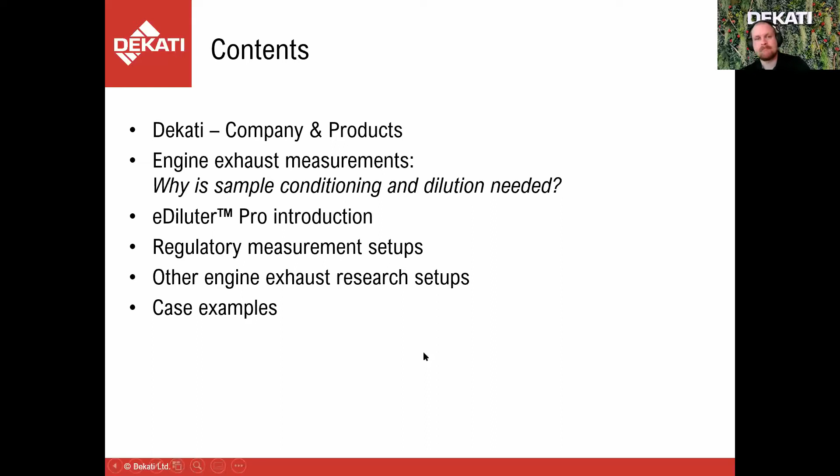Dekati has been developing and manufacturing fine particle measurement solutions for over 25 years now. Our background is in Tampere University of Technology Aerosol Physics Lab. We are located in Kangasala, Finland. Most of our sales goes through export through our wide distribution network.

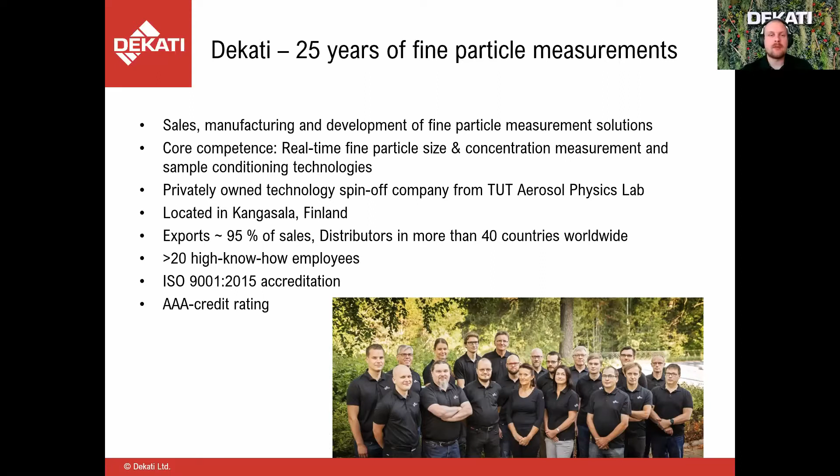As mentioned on the slide, it is not only the measurement instruments that we produce, but also we are specialized in sample conditioning - sample conditioning and dilution, even from very challenging sample conditions. Here's a quick look at our product range. In today's webinar, the focus will mostly be on the Dekati eDiluter Pro.

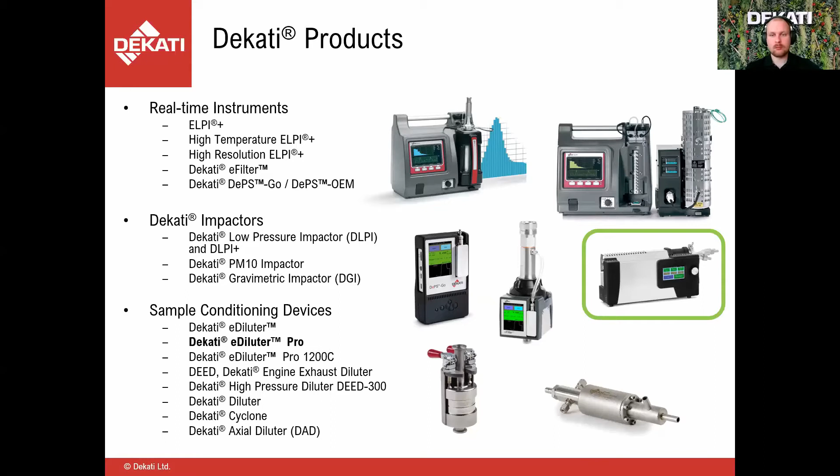Dekati instruments are being used in a very wide range of measurement applications, as can be seen here. Today the focus will be on automotive exhaust measurements.

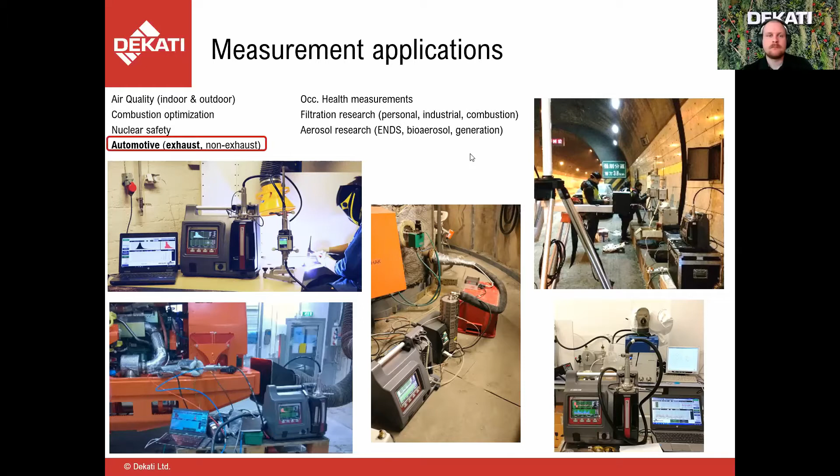For background, if we think about engine exhaust measurements and partially also particle measurements in general - why do we need sample conditioning and dilution? Here are some key points to answer that. One point is obviously to dilute the sample in terms of reducing the particle concentration. Basically all the measurement instruments for particles, at least most of them, have some sort of boundaries and minimum or maximum values for what particle concentration they can handle, and usually it is more problematic for particle number measurements than for particle mass measurements.

Also, when we are measuring combustion-related aerosols, it is important often to reduce the sample temperature. Again, most of the instruments cannot handle hot samples, for example.

Also, when measuring particles, it is not that straightforward that you just get some particles and then measure them, and then the results would always be comparable. You have to always take into account whether you include the volatile particles or evaporate them. In most of the cases, at least the legislative cases, you want to evaporate the volatile species so that you are not measuring them.

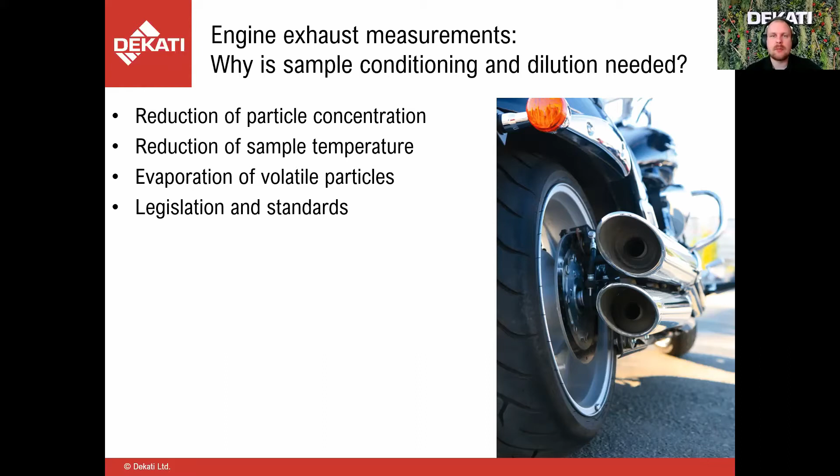I already mentioned the legislation, so regulations are also an important aspect, and we will look at those in a bit more detail soon. They also require usually some specific sample conditioning and dilution depending on the measurement and application.

Another important aspect is that, well, obviously the legislation sets its boundaries on how you can do the sample conditioning and dilution. But even if you are doing non-legislative measurements, you still have to do it carefully, because you cannot just use some kind of way to reduce concentration by randomly adding filtered air into the sample or having the sample cool down in some tubing or so on.

So in order to get good results, repeatable results, and comparable to other results, you have to take into account that the concentration and temperature should be reduced in a controlled and traceable way, because the particles are quite tricky to sample and measure in many cases, and they go through various kinds of sample transformations when they are being transported in the sampling lines, for example. So the dilution should be done so that we avoid this unwanted sample transformation as much as possible.

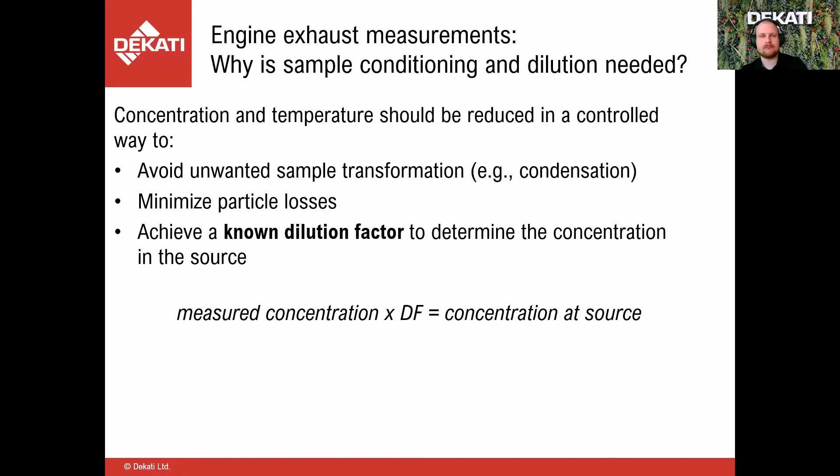If we look at the eDiluter Pro and how it copes with these challenges, it has a two-stage ejector dilution. The first stage can be heated, and the second stage is at ambient temperature.

In general, when measuring combustion aerosols and diluting them, it is preferable to have the first dilution stage heated, so that we don't get condensation of the sample and thus sample transformation. When we do the first dilution with heated, clean dilution air, we can reduce the vapor pressure and it won't condensate again.

Then it is safe to do the cold dilution on the second stage. This ejector dilution system also has some enhancements compared to the Dekati diluter, the DI1000, which has been widely used for combustion aerosols.

Part of the dilution air goes to a small axial type of dilution before the actual ejector, and it also provides a kind of sheath air flow so that the ejector nozzle will not easily get clogged.

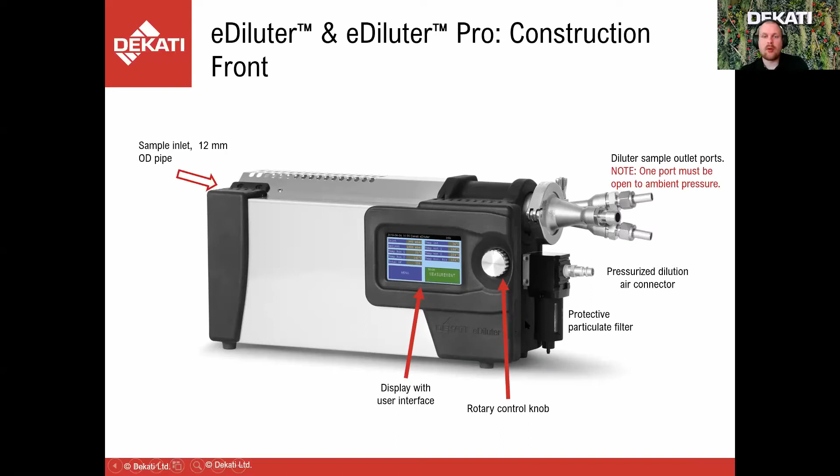Here's the display and the control knob. So the instrument can be controlled by this control knob, or it can be also remotely controlled via commands through this USB connection.

It is quite easy and straightforward to disassemble for cleaning, so you don't have to keep sending it into service each time it gets clogged. If you, for example, take very high concentrations or don't remember to put on the heating and condensate some sticky stuff into the unit, it's very easy to disassemble the diluter package, so to speak. You can get it out, disassemble it, and just clean it in an ultrasonic bath.

And for disassembling, you can see our YouTube videos. Also, we have videos on how to start the measurement, so you can have a look and see the convenience.

Some examples of accessories we can provide with the unit, so to make a complete solution, you can have all the needed components.

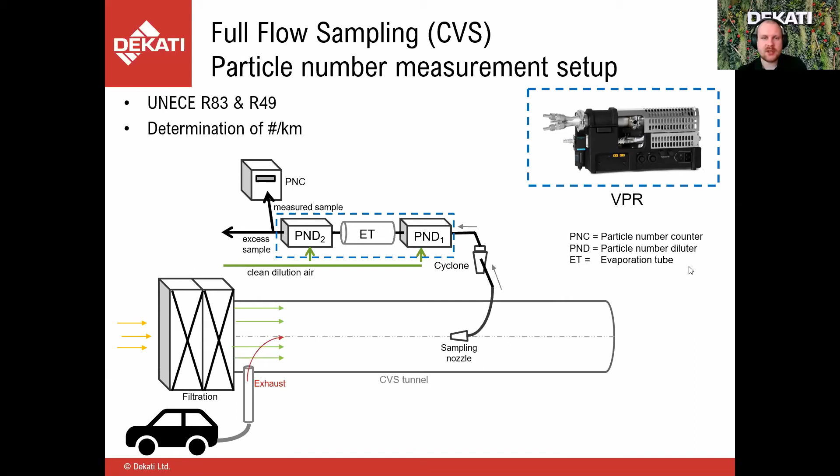Another option for particle number and mass measurements according to the UNECE regulation is partial flow sampling. In this case, the nozzle takes the sample from raw engine exhaust straight into a partial flow dilution tunnel, taking a constant proportion of this raw exhaust continuously. The flow controllers are very important in this first part of the system, and also for the total flow, since the total raw engine exhaust flow is measured so that the proportion going through the nozzle is always, for example, 2% of the engine exhaust going out. This is adjusted by adjusting the dilution air flow into the dilution tunnel, and the pump that pulls the full flow then determines the amount pulled from the raw exhaust.

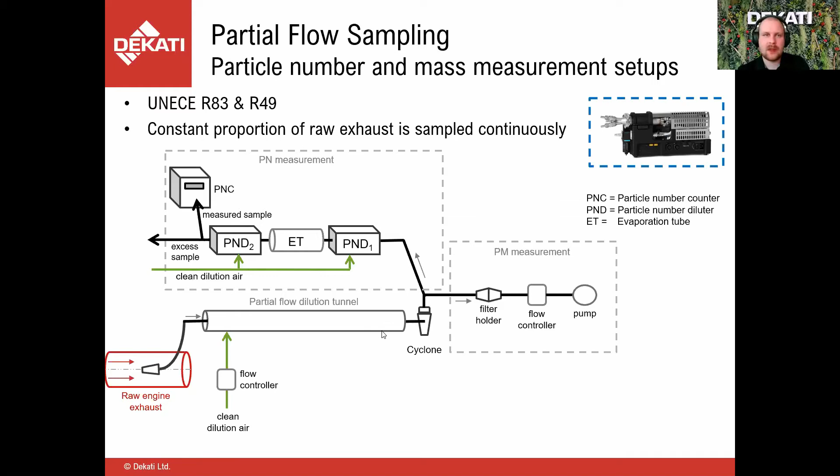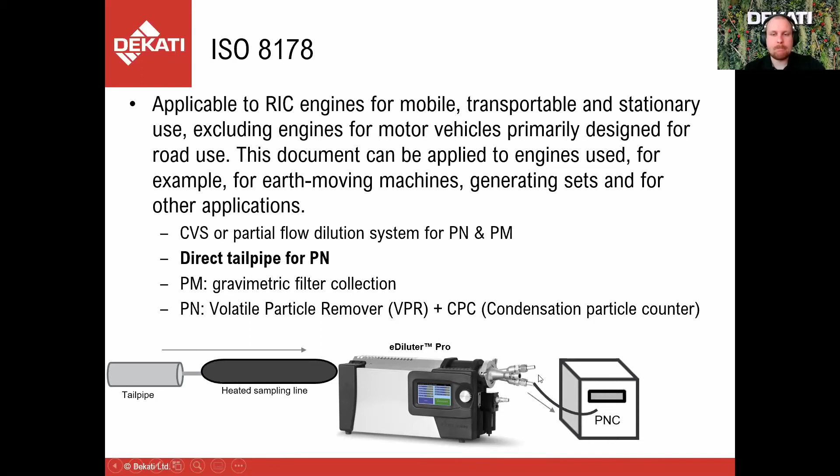So which standard applies to non-road vehicles? For those, CVS or partial flow dilution systems are okay for particle number and particle mass, very similar to what's okay under the UNECE regulation. But in addition, it allows direct tailpipe measurements for particle number. This is a very convenient option in many ways because it requires a lot less setup and instrumentation. A direct tailpipe measurement setup, for example, can look like this: a tailpipe, a probe going straight into the tailpipe, a heated sampling line, a volatile particle remover such as the eDiluter Pro, and then the particle number counter downstream. It is very simple compared to the complex setups we saw earlier.

So to sum up the regulations and how they relate to the eDiluter Pro: the eDiluter Pro is a compliant volatile particle remover for Euro 5 and Euro 6 type measurements according to the UNECE regulation, and also for non-road vehicle particle number determination. We have not only tested this thoroughly at Dekati, but have also now done certified calibration tests at Ricardo UK.

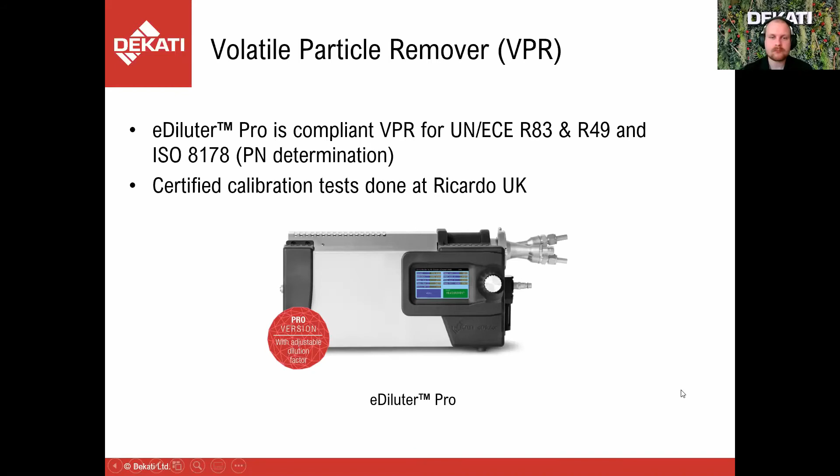Looking at the future of vehicle emission legislation, we obviously cannot be sure what the next emission legislation round will look like, but we are being active in this sense and keeping updated on future prospects and what is being discussed. The overall trend seems to be that legislation is moving a bit towards performance-based rather than technology or characteristics-based requirements, which in our opinion is a good and rational way forward. Instead of choosing a specific technology, legislative measures are looking more at what a solution must provide and at what accuracy, so as not to lock out technologies while ensuring performance requirements are well in place.

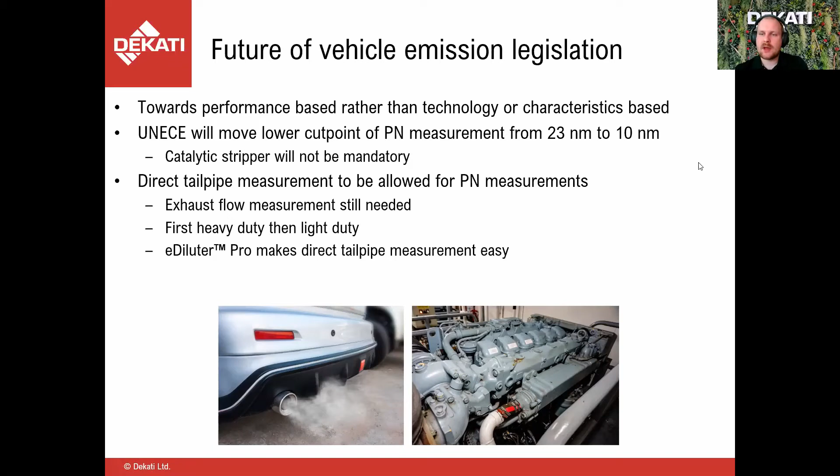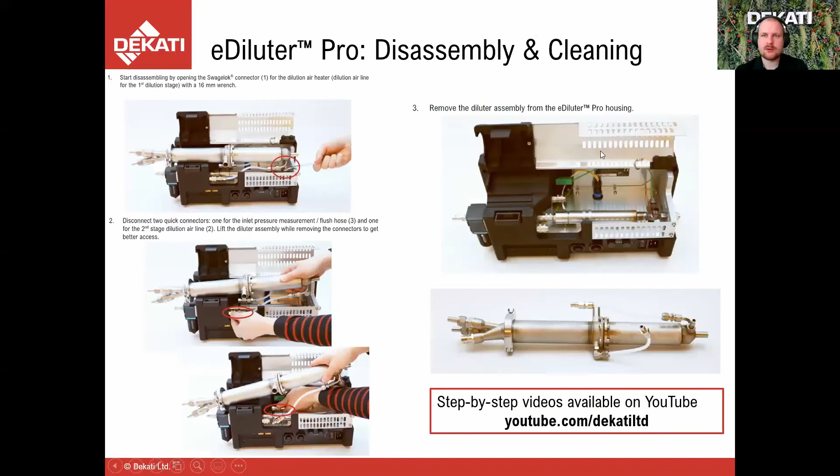Let's have a look, I have it here. The absolute maximum, which depends a bit on the sample pressure conditions, and obviously also the dilution factor, is 200 liters per minute and 7 bars absolute pressure. But this is kind of a worst case scenario regarding the sample pressure and dilution factor. With a normal sample inlet, like ambient pressures, and in the typical dilution factor range, it is closer to 5 bar absolute, and 120 liters per minute is the typical one.

Moving on to the non-compliant setup, some examples of those. Obviously those regulatory measurements are mandatory but also done very widely. But if we look at research and development and scientific research, other types of studies are also widely done on engine exhaust emissions. Here are some examples of measurement setups that can be provided with the Dekati instruments.

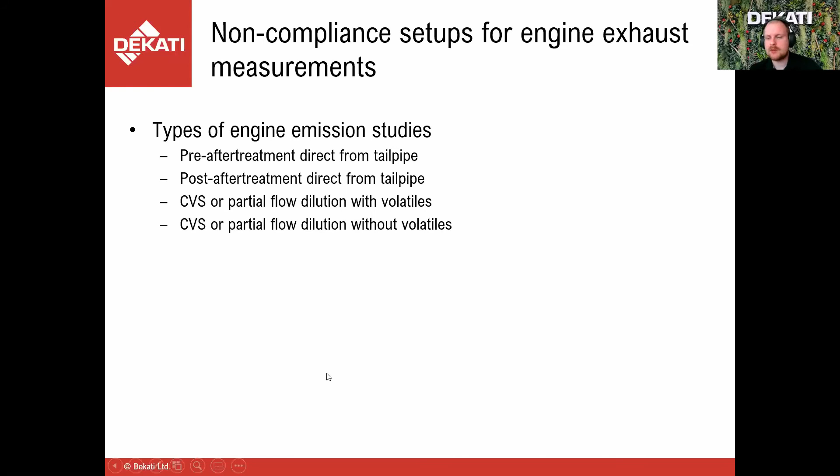If we look at pre-after treatment directly from the tailpipe, or depending on the engine and vehicle it might not be the tailpipe but a pre-after treatment sampling point, it is possible to just use the eDiluter Pro with, for example, a high resolution ELPI+ that gives you the size distribution in real time at 1 Hertz or even up to 10 Hertz. If it's a type of engine and location where the overpressure is very high, it can still be sampled using the DEED 300 in combination with these instruments. So basically, if it's over 1 bar of overpressure, you will need some extra equipment, but as shown, the eDiluter Pro can withstand some overpressure easily.

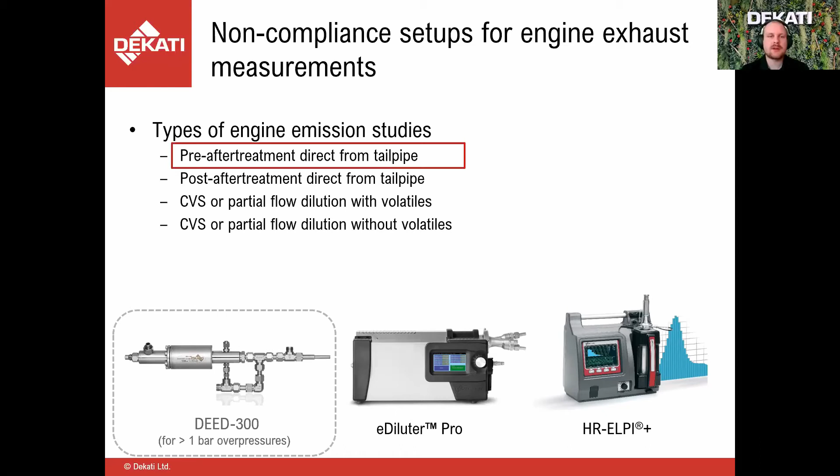If we look at post-after treatment, for example post DPF, a diesel particulate filter, as you know if a DPF is working as it should, it is very efficient at removing particles. So in those cases the sample is quite clean and might be almost particle free, compared to, for example, a direct injection gasoline engine. In many cases like this, the high temperature ELPI+ is a unique and good measurement solution, because it allows you to sample without any dilution - you can heat the impactor and then pull the heated sample straight into the impactor and measure it in real time.

If you are unfamiliar with the ELPI+, the electrical low pressure impactor, I recommend you check out our website or our YouTube channel, where we have content either in shorter format, a short ELPI+ video, or a longer webinar video showing the features of the ELPI+. Unfortunately, this one hour is not enough for me to get into the details of the high temperature ELPI+ or high resolution ELPI+.

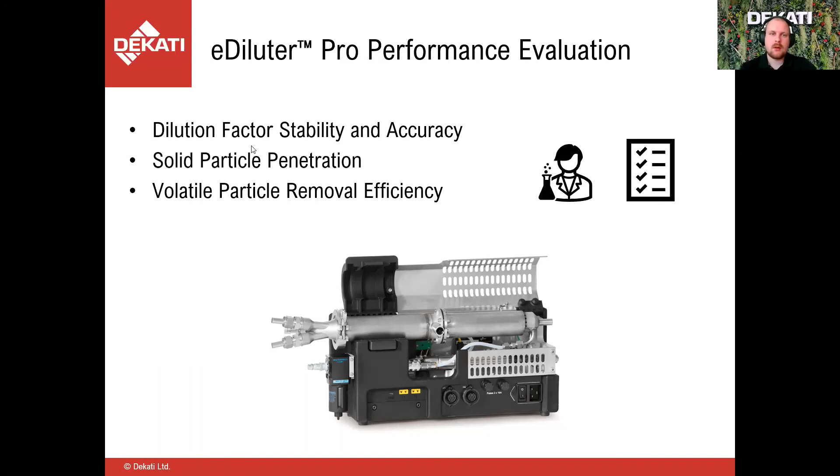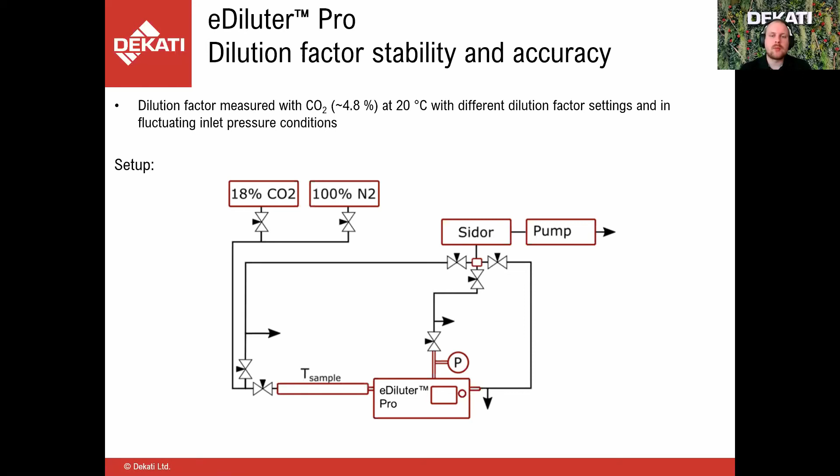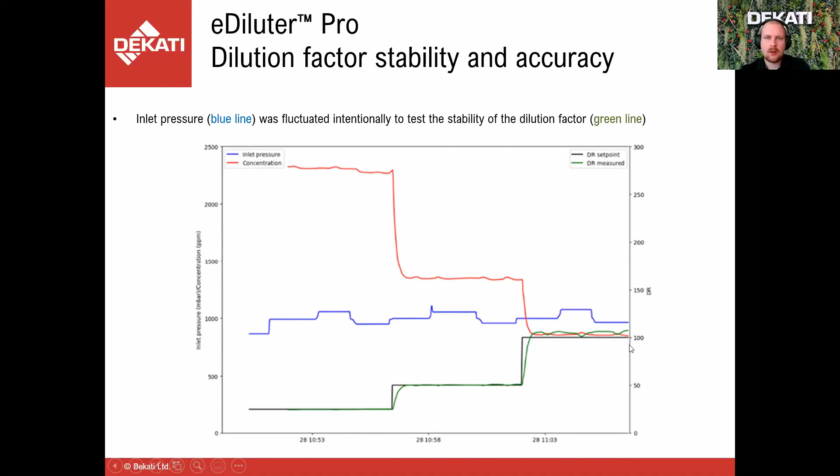Next, let's have a look at the solid particle penetration. In the regulation for engine emission measurements, there are requirements on how much of the solid particles penetrate through the system. For now, it looks at the sizes of 30 nanometers, 50 nanometers, and 100 nanometers in electrical mobility diameter. The penetration of 100 nanometer particles is compared basically to the penetration of 50 and 30 nanometer particles, and the difference cannot be too large.

We did all of these measurements with the whole sampling setup, so not only the eDiluter Pro, but it also includes the losses of the heated sampling line, 1.5 meters. In this test, monodisperse salt particles are being used, and we tested it with different dilution factor settings at ambient temperature and also at 300 degrees Celsius.

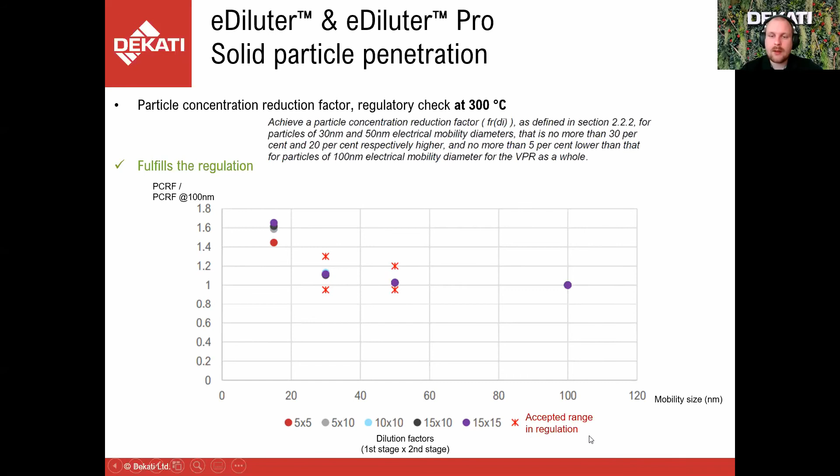So we're very happy about these results, and again, the same results here for 300 degrees Celsius. These tests are also done at Ricardo, UK, and they confirmed the same results - well, obviously not the exact same results, but they also had the numbers within the accepted range of regulation.

The last tests here related to these regulations: volatile particle removal efficiency. According to the regulation, the volatile particle remover must remove volatile particles efficiently. It has to remove over 99% of 30 nanometer tetracontane particles when the inlet concentration is over 10,000 particles per cubic centimeter.

In this case, the setup is similar, but we use different particles, tetracontane particles, which are volatile. Then a DMA classifies only the 30 nanometer mobility size particles, and again we measure the particle number before and after the eDiluter Pro. In this case, we wanted to only look at the eDiluter Pro - obviously some volatilization would happen if we use the heated sampling line, but we measured without it because we wanted to see that the eDiluter Pro would cope and be able to volatilize those particles also by itself.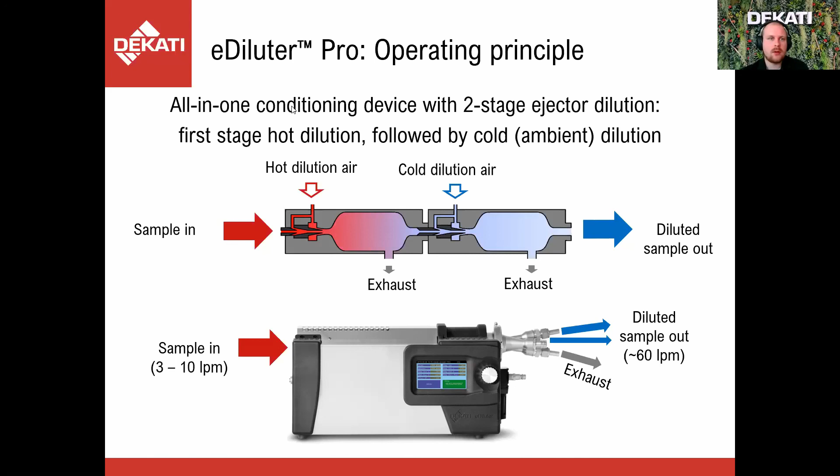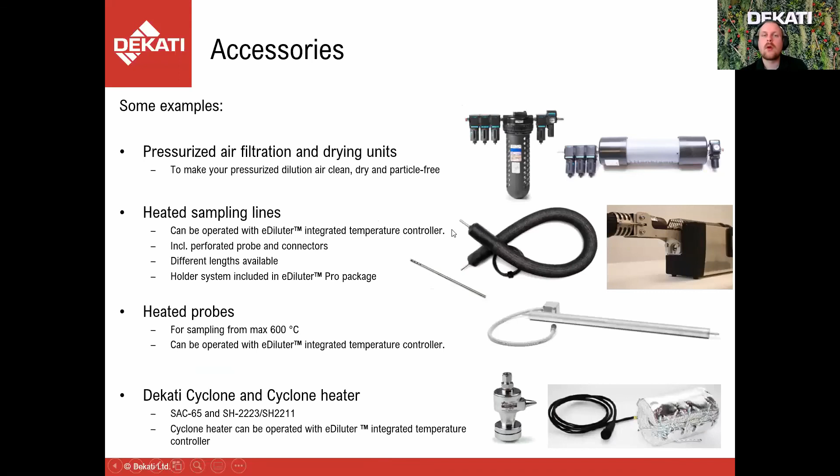But I wouldn't say that there is a drastic difference in most cases. Okay, thanks, those are the questions for now. And let's have a look at the last slides concerning a couple of example cases.

So here's one example case. We did at Dekati some measurements for a Euro 6 diesel passenger vehicle, but it had a broken DPF. Actually, it's one vehicle of the people who work at Dekati. They don't have that car anymore, but when we tested and did some demo measurements, we noticed that the DPF was broken because the particle numbers were way too high. After that, we did some more measurements, which also provided us the opportunity to test our instruments with a vehicle like that.

So we had a straight from tailpipe, a non-compliant setup, because we wanted to look at the size distribution data too. We had one setup that had a perforated sampling probe, heated sampling line, and a high temperature ELPI+. The heated sampling line was heated to 200 degrees Celsius, and the high temperature ELPI+ impactor to its maximum value of 180 degrees.

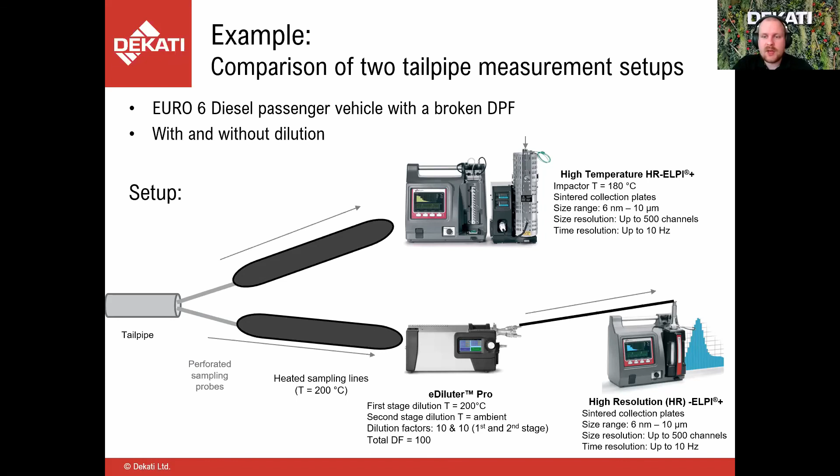The other setup had the same sampling line and sampling probe, but here we did a 2-stage dilution with the eDiluter Pro with a total dilution factor of 100, and then the ambient temperature sample went into the high resolution ELPI+, so it didn't have the heated impactor. We wanted to compare the results for these two setups and see how well they match. Both of the instruments had sintered metal collection plates on them.

So here are the results of those measurements. On the orange line, you can see the high temperature ELPI+ results - without dilution, straight into the heated ELPI+. The other one, the more yellow colored one, is the one that was diluted with the eDiluter Pro.

Here you can see results for both cold start and then another measurement done when my colleague had driven the car for some time and warmed the engine up, and then the emissions were lower, but still much higher than what we would have seen if the DPF would have been working as it should. But we were very happy about these results.

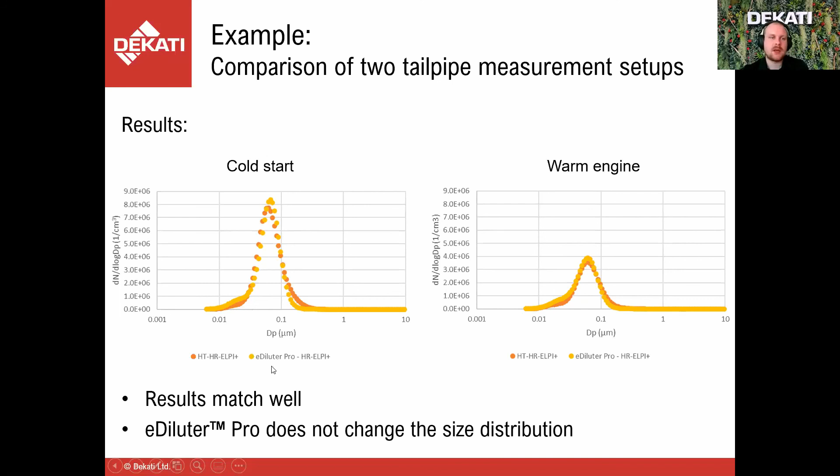They match very well and show that in this case the dilution did not change the size distribution, and also the dilution factor seemed to be accurate, because obviously these results for the diluted sample have been corrected with the dilution factor, and after that they show the same range of concentration.

Here's another example of some non-road vehicle measurements we did on a mining vehicle, a Sandvik mining truck. In this setup, we had heated sampling line, eDiluter Pro, and the ELPI+. Here is the test protocol they use for these mining vehicles.

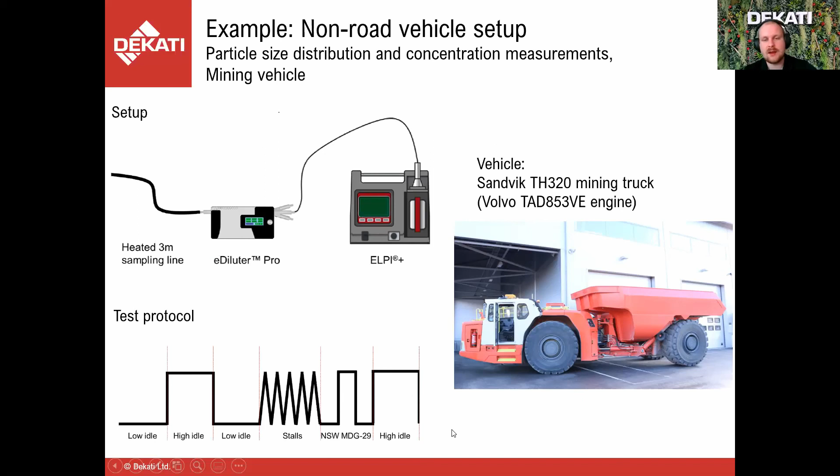They don't have any, at least in most places, like their own dyno for these mining trucks. So what they do is they have this kind of test protocol where they have the engine running in low idle, then they put the brakes on and push the throttle against the brakes, have the high idle, then again to the low idle, then some shorter stalls against the brake, again one longer stall, and at the end another high idle phase.

So here are some pictures of the setup. Again, we had the probe inserted into the tailpipe. It was led to the eDiluter Pro and then onto the ELPI+. You can also see that the dilution air is connected into the eDiluter, and there's a cleaning and drying unit in between.